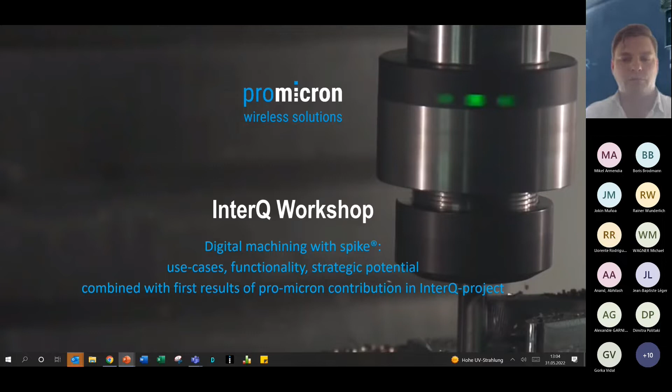As agenda, I will start with the following topic: what does Promicron understand by digital machining? What is our goal, what is our uniqueness, what do we want to achieve? Then I will explain the unique measuring concept, the current situation with the software and hardware, and give an outlook for the development. Then we will quickly go into the use cases of InterQ, and at the end we will have questions and time for discussion.

I will start my timer - 40 minutes. In 40 minutes I would like to discuss the questions, so to start with the questions: if there are concrete questions in between, please let me know. I can say if this is relevant now or if I will answer that later on, but sometimes direct questions on specific topics need to be answered directly.

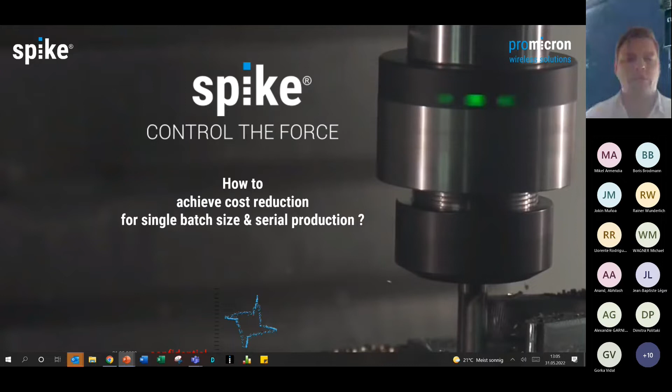What is it all about with Spike? This is a little bit the pitch I use also in sales, and I start with a question: how do we achieve cost reduction for single batch size and serial production? And to introduce the topic where we are focusing, I start with another question.

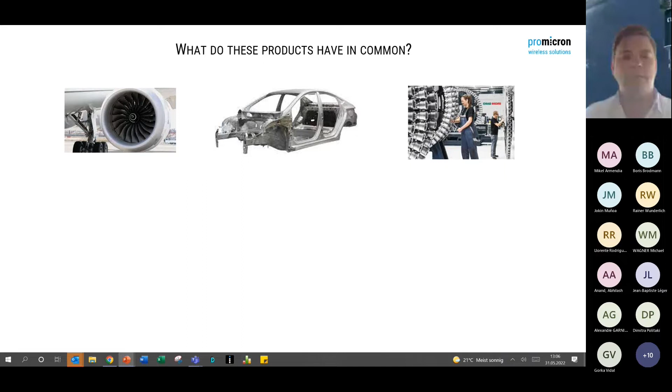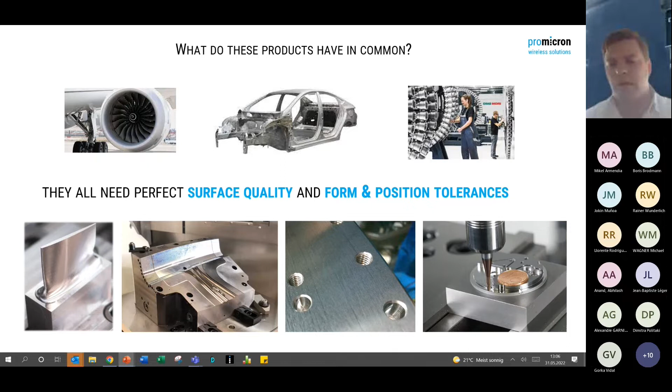What do these products have in common? They represent a little bit the industries - aerospace, die and mold, automotive industry, high precision machining - and the answer is they all need perfect surface quality and form and position tolerances. It doesn't matter if it's a Blisk, a blade, a die, a huge precision workpiece, or if we talk about micro machining.

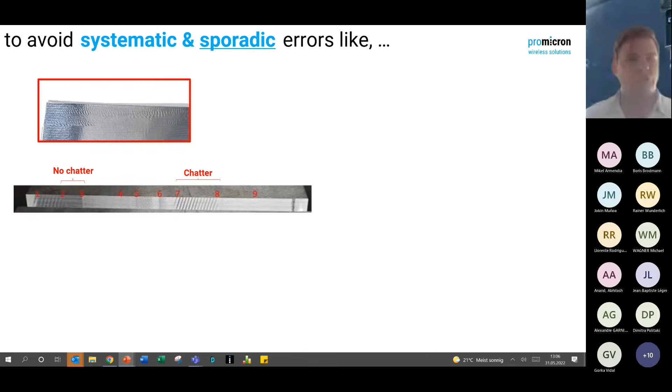To avoid systematic and sporadic errors like this, for example a chatter mark or chattering, or a scrapped thread, or single cutting edge tool wear and single cutting edge breakage - here with a full fluted end mill, here with a ball end mill. So it's a systematic error here with systematic tool wear, and here it's a sporadic tool wear with a scratch on it with a chip.

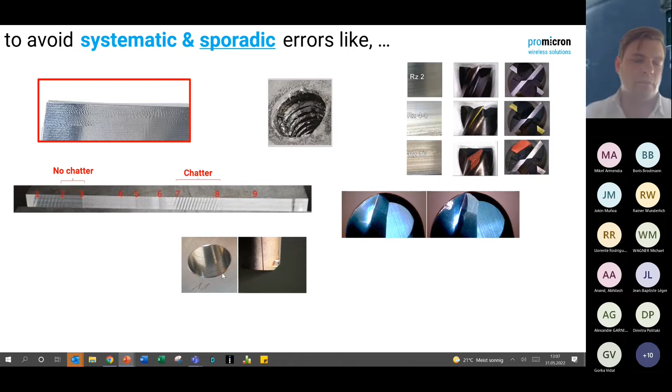Here we see a micro chip tool wear on a reamer, which cannot be seen with your own eyes, but this leads to bad surface quality of the hole. We also have sporadic mistakes like tool deflection when the form and position tolerances are not in line, and in micro machining, tool breakage - even quality issues are a topic.

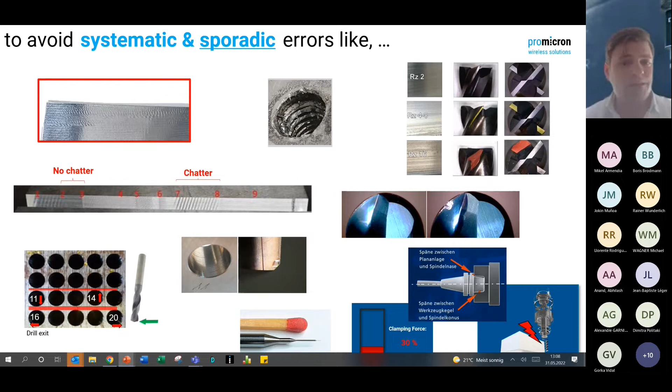And last but not least, issues like a 10 micron chip between the tool holder and the spindle, or a spindle overload while cutting, or if the clamping force of the tool holder is not enough anymore. All these systematic and sporadic mistakes happen in machining, and in order to avoid these, the manufacturer needs to check every workpiece made.

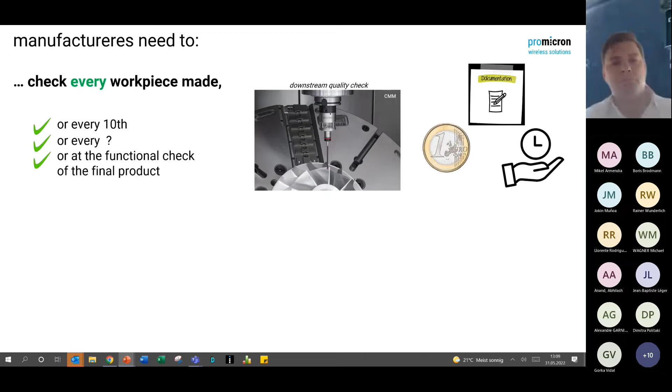So he has downstream quality check efforts, and depending on the customer, they check every 10th, or only at the functional test. That means downstream quality effort, which means costs, documentation effort, and time. I think this is also the main topic of InterQ - we want to have in-process quality control, to be more competitive by cost reduction, by making production more simple, and to take the costs and efforts we have pre-process and post-process and bring them in-process.

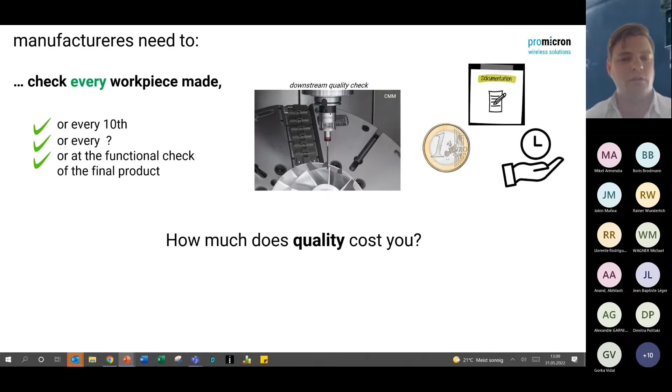So my main question to the end users is: how much does your quality cost you? Because this is what we want to reduce.

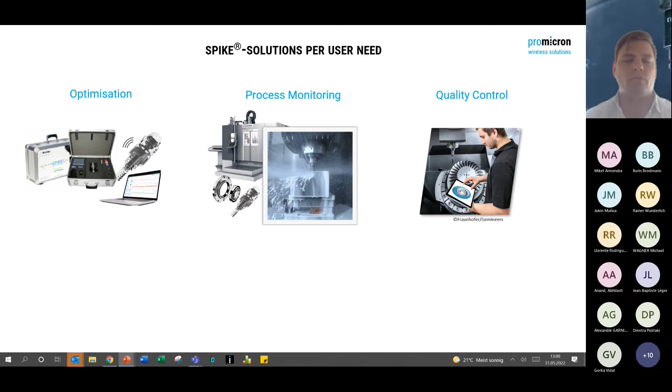This is an overview of our Spike solutions per user need. If we look at the pre-process analysis and optimization, we can use the collected data, the system as a diagnosis system. When we talk about downstream use of the generated data, we are in the area of quality control. And if we are in process, then we have process monitoring features to detect errors and automatically react. So basically, these are our three user groups.

When we look at the goal of cost reduction by in-process data, this graph should give you a little bit of an overview of how we see things and where we see Promicron located. Here we have the value chain of a production site. In the beginning, we have the construction with a 3D or a technical drawing.

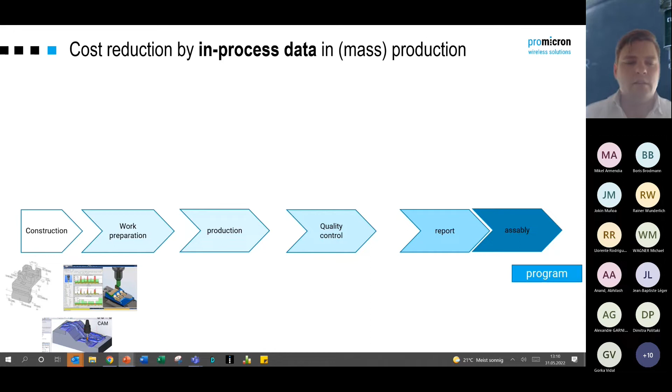In pre-work preparation, we have systems like Vericut Force, or we have the CAM program from Solid CAM or from other suppliers. In production, when we look at the machine, we have the machine itself, we have the machine data, we have external sensor data. When we look at the tool, there is a tool manufacturer with the tool management systems. When we look at the quality, there are the quality measuring systems all downstream, or a Blum laser, which can be used from process to process, but on the milling machine.

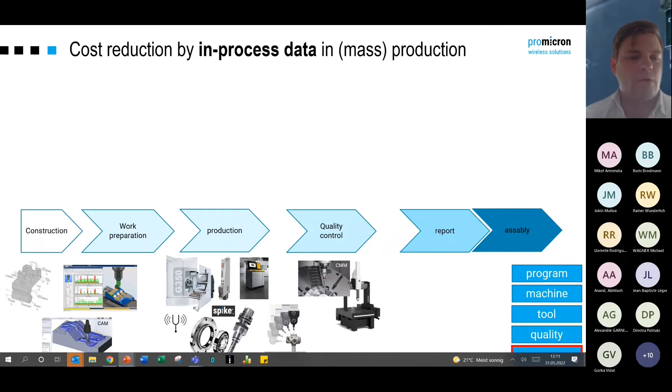And when we look at the process itself, then we also have data from our Spike technology. So there is our sensor located. Our data generation method, but the software from Promicron, the tool control center, is like an overlapping approach in order to, based on the data that we collect, provide output for every different user group along the value chain.

The goal is to bring down the downstream quality inspection effort in production and to have an exchange between the pre-work preparation and the production — for example, to get a reference force value in single part production from a CAM program or from a system like Vericut Force, and to monitor this value, this information, this force level, and also give feedback to the CAM program on where to optimize the program.

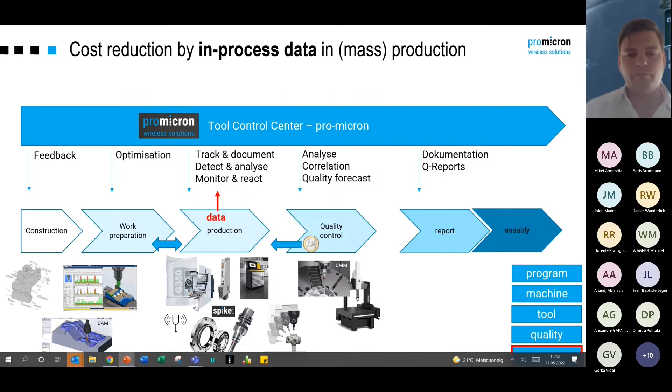Next point of the agenda, the unique measuring concept. Is there any question until now? It seems not. Let's jump into the next topic, the unique measuring concept.

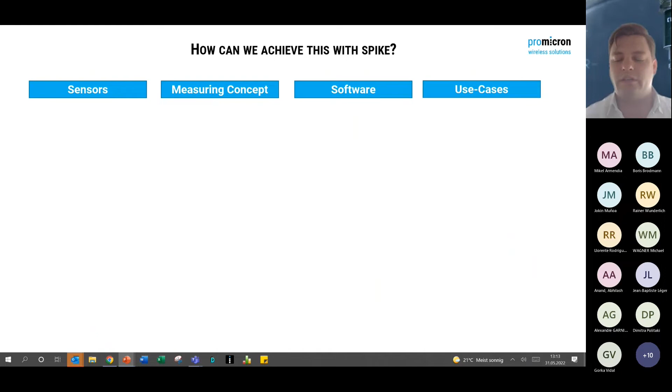Spike is not only a sensor, which is where we started. When we talk about Spike, we need to talk about the measuring concepts, the uniqueness, which kind of signals we provide. Spike is also a software, and the topic of use cases is also something I would like to explain quickly. Which kind of sensors do we have?

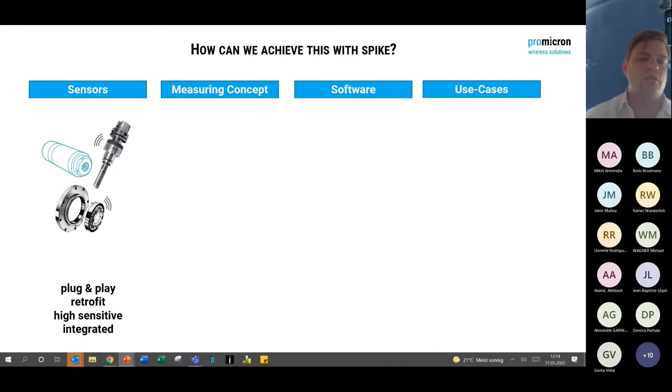Basically everything that is on the machine, because now we have the option to read the machine information — for example, the spindle load, the axis data, the NC code, the tool table — all this information we also see as sensor or signal data. And next to that already existing information, Promicron is now adding sensor data, force signals directly from the tool holder, as a retrofit solution, or the in-spindle integrated solution designed by DMG Mori Group and spindle manufacturers.

What's the uniqueness? We do not only measure the feed force and the torque, which can also be read by the axis load or the spindle current. In our case, we measure it directly. We also now have the bending load, the radial forces acting at the tool, from two directions — we look from the tool perspective, not from the component perspective.

Because of this, we are able to visualize the forces on each cutting edge. We have a signal, the bending moment signal, which correlates pretty much with the quality — so here we have a pretty nice and fancy quality-related signal. The signal is measured directly and transferred wirelessly to a receiver, which can be connected with the machine or not, in order to be flexible. But the concept here is wireless.

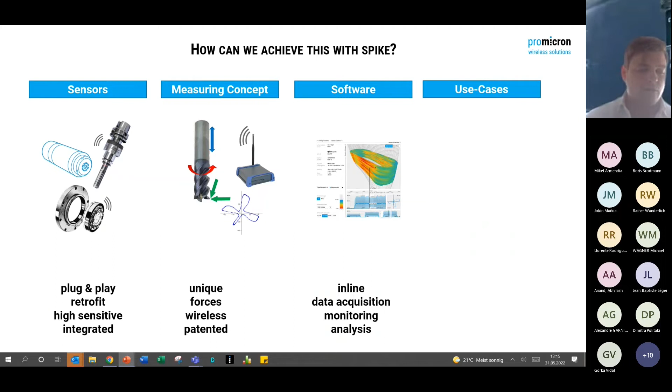The software — we started with a normal diagnosis software. Now we've designed a new software approach, being able to store the data web-based in a database. That's the first feature.

The second is we now have access not only to our own sensor signals, we can also read the machine signals, so data acquisition has been improved. It is inline, so we can record data automatically via the PLC or via the NC code, for example. And the software is getting more and more monitoring and analysis features.

As you know, software can improve through software modules or add-on modules — we just basically started with a new concept. Use cases is a very interesting topic. As we have it in the InterQ project, we try to involve the partners or companies along the value chain, because we know we cannot solve all the problems by ourselves. We are just part of the cake, let's say.

As we see, it's pretty innovative, and we are actively working together on solving use cases together. With our sensor signal and the software tools we provide, innovative business approaches, like which we also face in InterQ, are even possible.

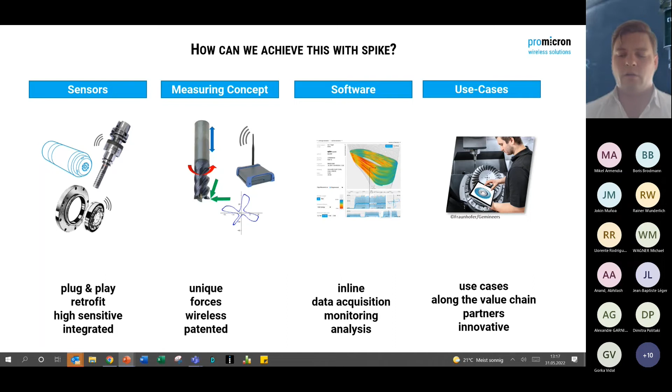Let's go a little bit more into detail on the uniqueness of the measuring concept. Again, our strain gauges with the electronic components and batteries sit on the holder in this ring, or in the spindle. Because of this, we are looking from the tool perspective. We have the axial force, the torque, the bending moment.

If we have a finishing operation like this, the single cutting edge is acting now in the material. That's why the bending load also has the time to jump back to zero before the next cutting edge comes in. By looking at a time frame, this enables us to visualize the forces on each cutting edge.

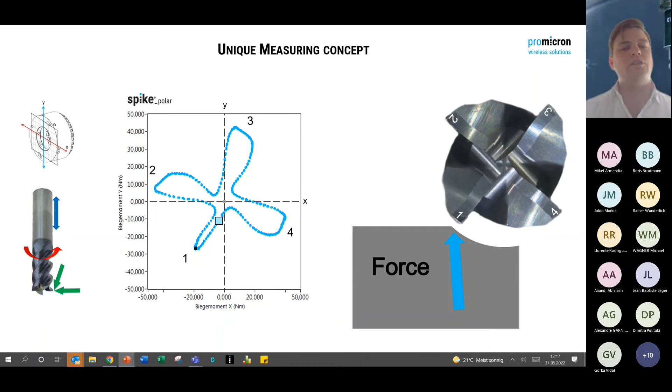Why is that beneficial? Because if we have a tool wear problem which leads to bad surface quality, and we do not want to stop the machine, open the door, and look at the tool or the surface quality, we need another method. Force is a very good feedback on the performance of the tool and the process stability, and this is what we do.

We visualize the forces on each cutting edge with the patented Spike Polar software feature. You see here the flower, let's say, or the cross, is small and symmetric. When the tool is wearing out, the force impacts and angles are changing, and the force value is getting bigger.

Effects like a tool breakage or cutting edge breakage can even be detected, because as an engineer you can read the picture. It's now unsymmetric, and one force flower, let's say, has been lost.

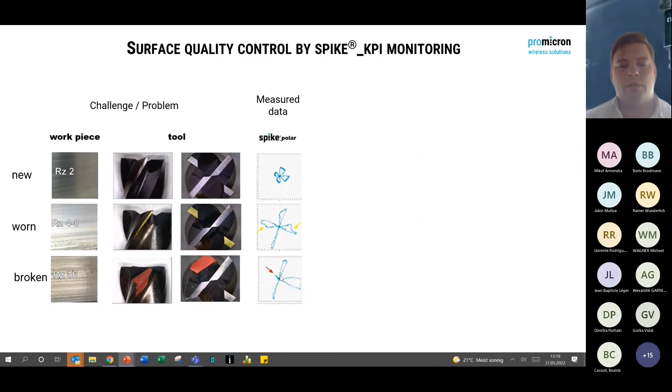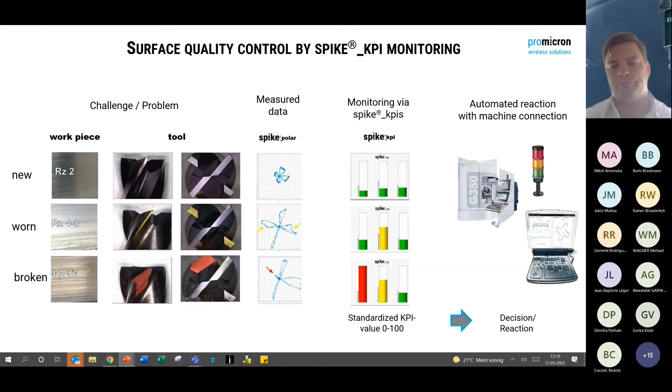The problem is we can measure and visualize it, but how do we monitor it? Here we are working on KPIs, process-specific values between 0 and 100, to give us feedback about the condition of the tool. And if we have this in our software, we just need a machine reaction, a method for integration, to achieve automation.

How does that look in drilling? In drilling, we want to achieve quality-related issues like drill runout, centering errors, tool wear, chipping, or concentricity errors, but also topics like tool breakage are interesting. Sometimes the spindle load is even sensitive enough to detect if the process happened, yes or no, but we want to focus a little more on the quality.

This is what we had here. We machined 20 holes and looked at the quality at the drill exit, and found that the tolerances of hole 11, 14, 16, and 20 were out of line. That means the tool must have been deflecting. Can you see this in the feed force or the torque, which can be compared to the spindle or machine information?

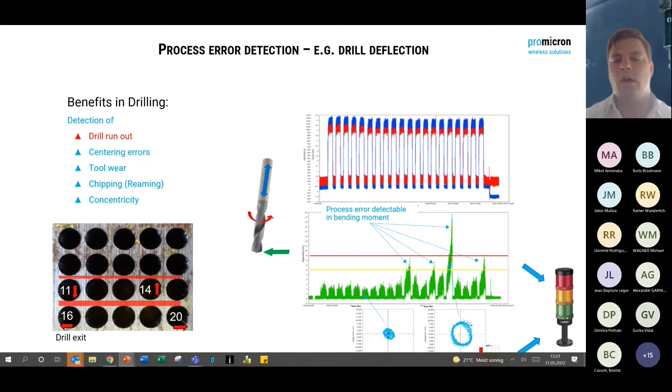No, you cannot detect it. But let's have a look at the bending moment signal. Here we detect higher load at hole number 11, 14, 16, and 20. If we have algorithms like envelope curves or the KPIs, this could be interpreted and monitored, and with a machine reaction we could even say this drilling hole, or now the drill, is not performing anymore, and trigger an automatic tool change.

So the concept is we are collecting big data directly from the sensor, but the software is filtering the data. Still, by reducing the volume, we are able to use algorithms like the symmetry KPI, a chatter KPI, a donut form KPI in drilling, or a runout KPI.

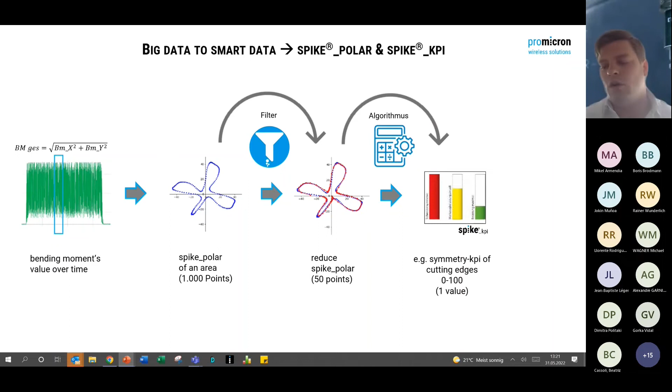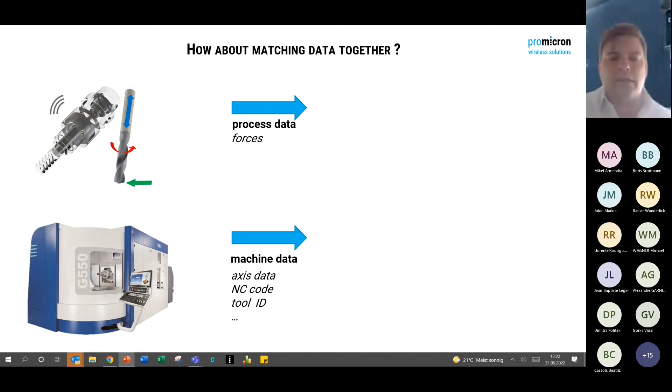Now, what's the current situation and the outlook for development? In recent years we thought, now we have the external sensor data from Spike, but what about matching that process-related data with existing data that's already on the machine, like the machine data, axis data, NC code, and the tool ID? I think we can generate much more benefit from that.

Even when we talk about topics like digital twin, everyone says we have a digital twin of the CAM program, of the machine, or even of the CMM part. But what about the process? This is also found and used in the InterQ project.

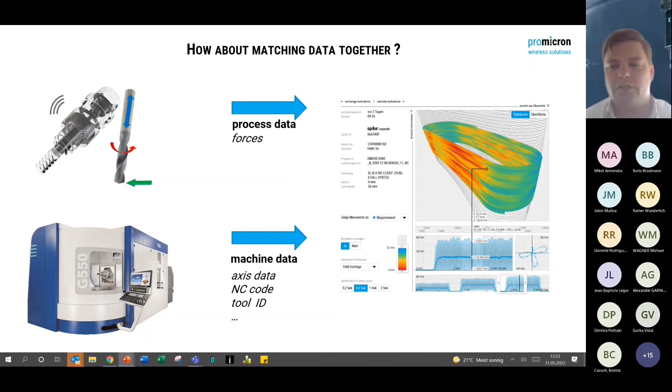And here we place the first version of our software, where we are now basically visualizing and matching the forces collected by the machine, spindle torque, or external sensors like the Spike bending moment signal, with the NC code and with the position, the XYZ position of the tool center point. Based on this, we don't only have a tracking software and visualization, we can also export the data, and more features like offset detection and so on will be available in the next years.

This is the Blisk machining example, which we have shown also during the InterQ general meeting. I would like to show you now our typical Blisk example, which we have machined just two weeks ago when a machine tool builder was visiting Promicron.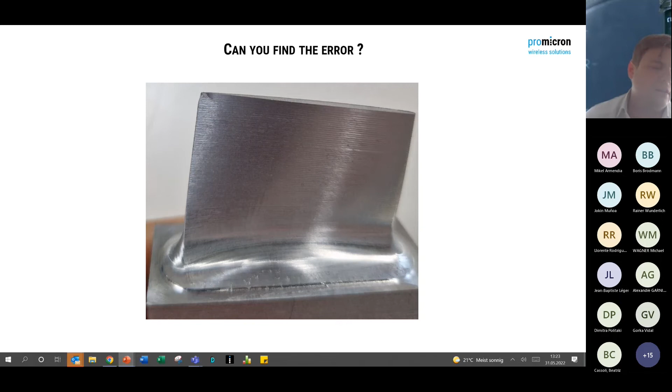My question to you is, can you find the error? Can you find the quality related issue on that part? The customer and visitor said, yes, I found something, it's here top on the left. And I said, okay, I didn't know what the data was giving us from the Spike software.

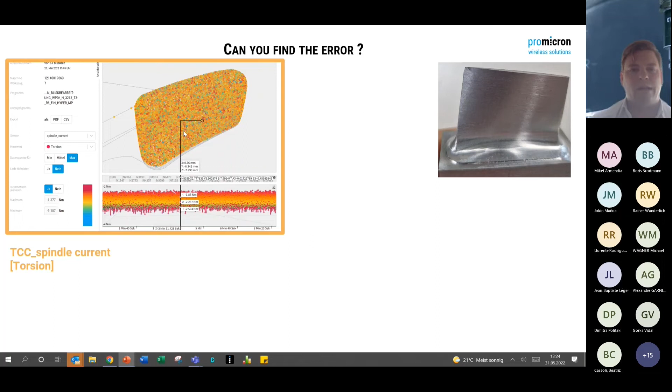So we started by looking at the spindle current, the torsion signal from the spindle, in our Spike map software. And this is what we got: the force data with different force levels, colored in different values, linked to the NC code and linked to the position on the part. But yeah, it's like a big cloud, I cannot see any force differences.

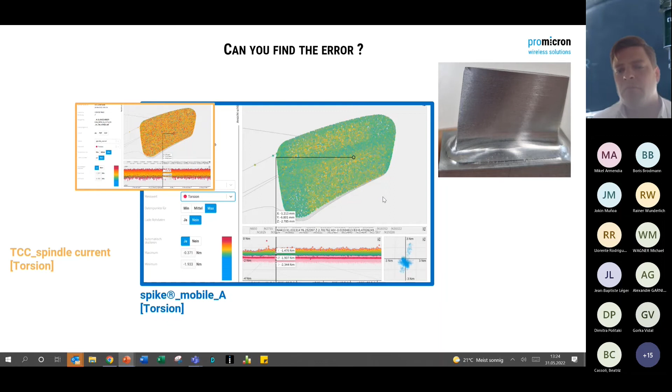Then I just switched in the software to the torsion signal from the Spike mobile holder, which we have used, and we already saw a little bit more difference between the noise and the forces. The coloring, also the scale, was already showing us a little bit more detail, but still I would say I cannot see the error.

Let's have a look at the bending moment signal, which we collected, and now it is getting more clear. This is exactly the same spot in the, let's say, digital twin of the process, of the workpiece, of the cutting forces linked to that spot of the part.

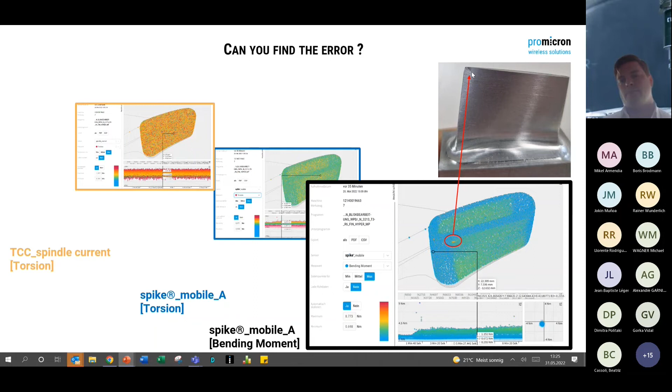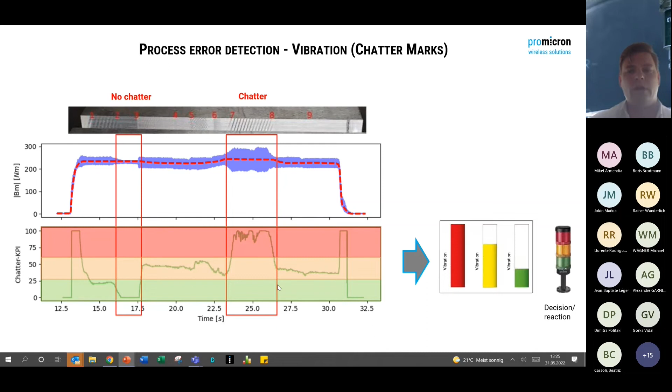So when we think about further production or line production, we have issues like chatter marks. With Spike, we can record that data. With Spike KPIs, we calculate, we analyze inline that kind of issue, and we create that output with the KPIs.

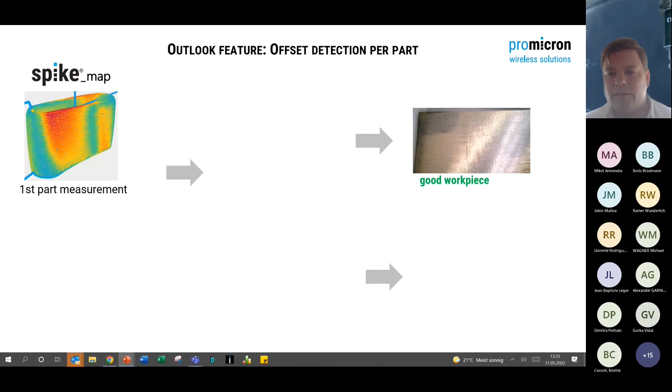If we have recorded now the first part, checked the quality and seen that this is good quality, then in a new software feature which we are working on, or which could be an option, we create a reference file. And now if there is, in the next part, a chatter KPI warning, let's say, then we could mark it in the reference file directly where this is on the part, in order to know already in process if we have quality issues.

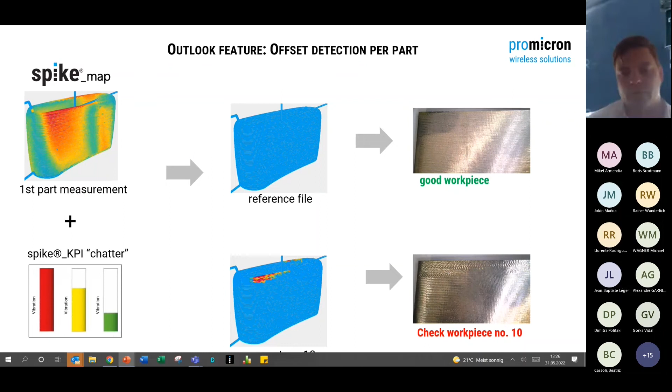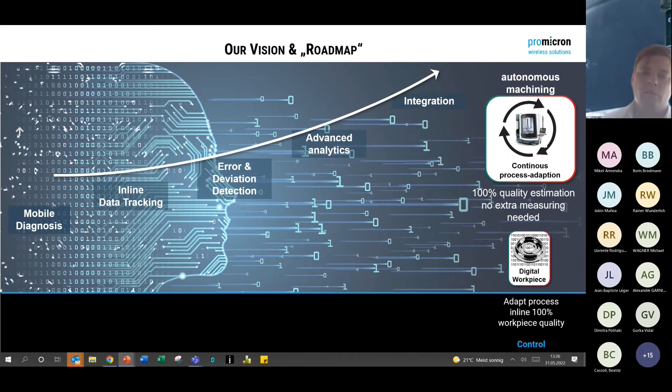So our vision is also fitting to the InterQ project and to the goals. The autonomous machining, continuous process adaptation, and 100% quality estimation without extra measuring effort needed, is the main goal. The digital workpiece is the tool, I think, which enables us to achieve that. But until we achieve that level, a lot of homework needs to be done.

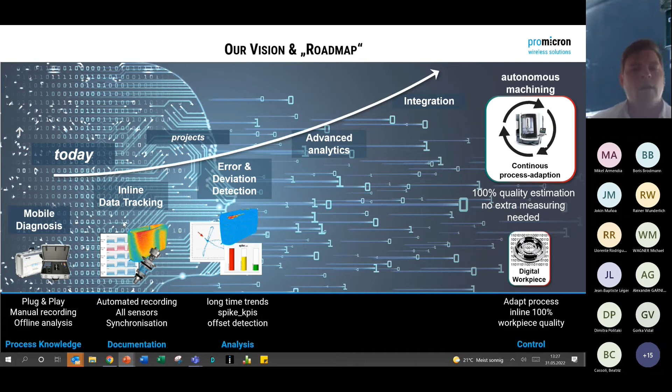Today and in projects, we are at the level of using the Spike technology as a mobile diagnosis system. With the tool control center software, we are now having an inline data tracking opportunity. And in projects, like InterQ or other own projects which we are running, the error deviation, or error detection and advanced analytics, is being done in order, later on, step by step, depending on the use case, to integrate that system directly also for monitoring and for automation.

But these are all the homework on our roadmap, which we need to do together in order to achieve the digital workpiece.

Now, I would like to go into the next topic, the use cases and the status of Spike technology in the InterQ project, if there are no questions until now.

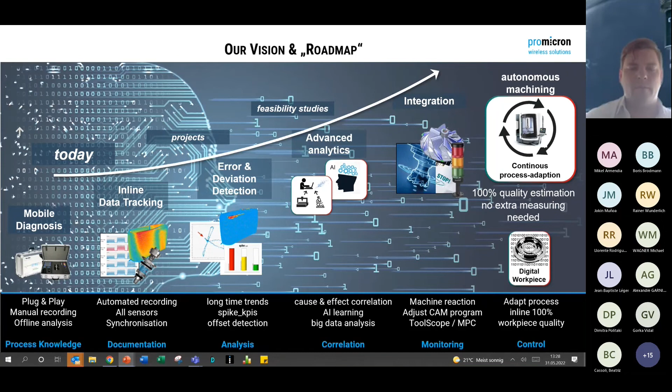I copied a little bit the slides from the last presentation from Xavier. Where are we in the InterQ project? As you know, there are three use cases, from ITP, from Siemens Gamesa, and from Renault.

In the grinding operations, we focused on designing a more sensitive tool holder and providing data here. And on this same side, we said if we have that data, we need to work on the algorithms, the KPIs, and the data interpretation. So in grinding, our role is to provide a more sensitive holder and more advanced knowledge about error detection.

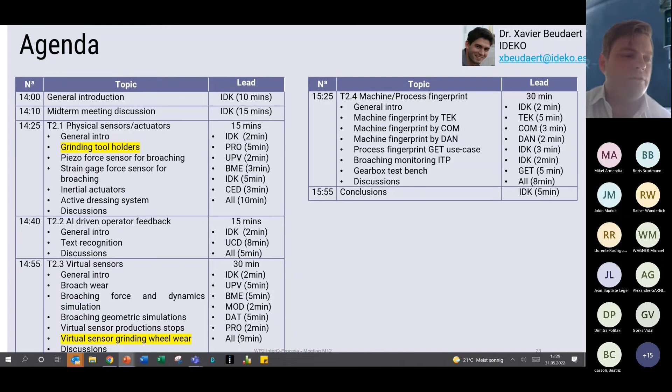Other features like the tool control center and the milling holders or drilling holders are also used in other use cases. But here we don't really need to go in with new development since it's already available. So a quick overview about the physical sensor.

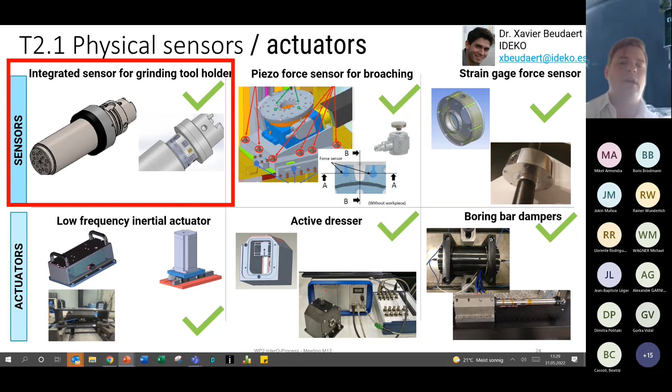Here you see the first prototype which we've done. Basically we are providing two solutions. One is with the standard sensor technology, but with an optimized and improved tool holder structure or design to achieve a higher stiffness and a higher sensitivity.

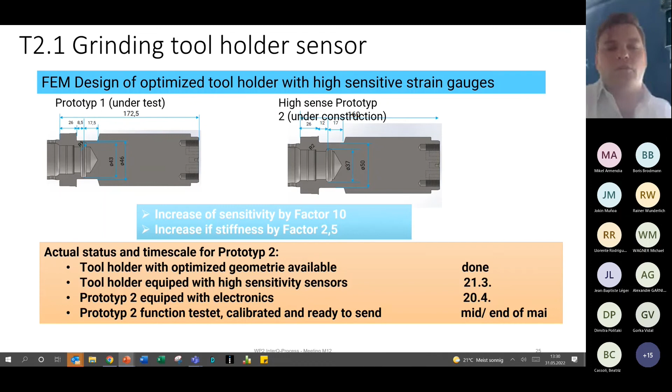Here we already received some improvements. We increased the sensitivity by factor 10, increased the stiffness by factor 2.5. But it's not enough. That's why we will provide a new sensor technology on that improved tool holder design in order to achieve a much higher signal and sensitivity.

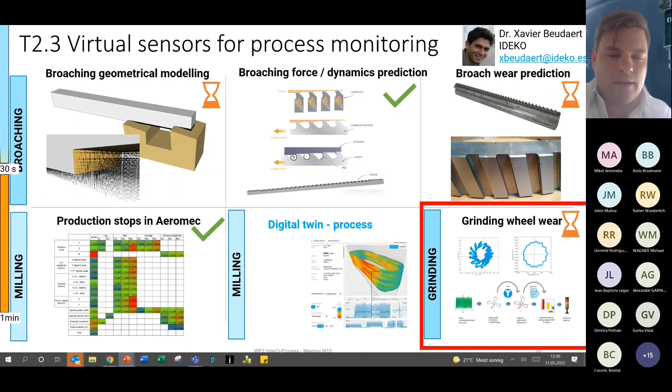The grinding wheel tool wear was the second topic. We have collected with Xavier and his team more data on grinding, which is now being analyzed to find out if there are criteria which are quality related and which could be put in as a Spike KPI. This is a quick overview of some tool wear trials which we have done.

You see the Spike Polar. It is centered pretty good in the beginning, so this is the first output which we can get. The balancing of the grinding wheel is pretty good.

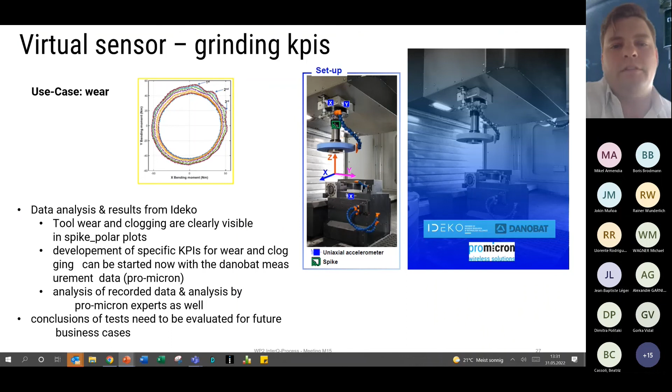But when we see the roundness of the Spike Polar ring, it's getting worse, especially in this area, and the force level is increasing because of tool wear. So these are now raw data signals which we are looking at more in detail.

These are some other examples - unbalanced effects or brushing effects, or dressing effects, are now going to be investigated. I just wanted to explain here what we did.

We have four different situations in the upper brushing example where we did a mechanical and an automated brushing process of the grinding wheel in four different situations, and this is the force signal output you get after these situations. If these are technical cases and process errors, they could look like this, and now we just need KPIs to analyze and monitor them.

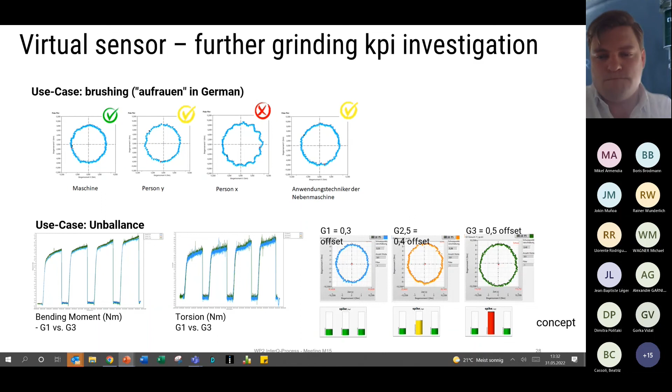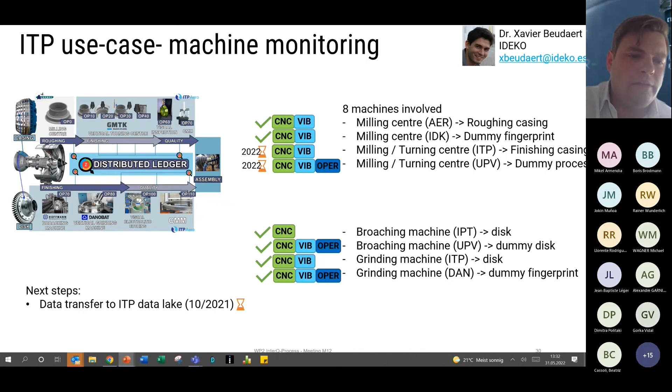In the InterQ project, there's one use case from ITP where a lot of turning, but also milling and drilling applications are in these operations. What did we do here?

With the CFAA, we installed the first version of the tool control center software, and we were trying to find out the sensitivities which are required and the software output which we are generating. We used a milling operation in this casing part, which we will now investigate more with ITP itself.

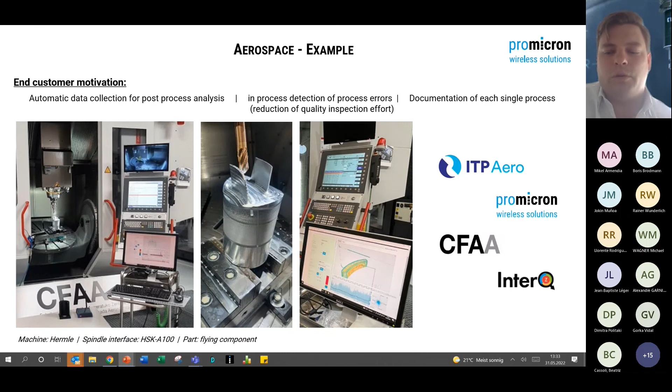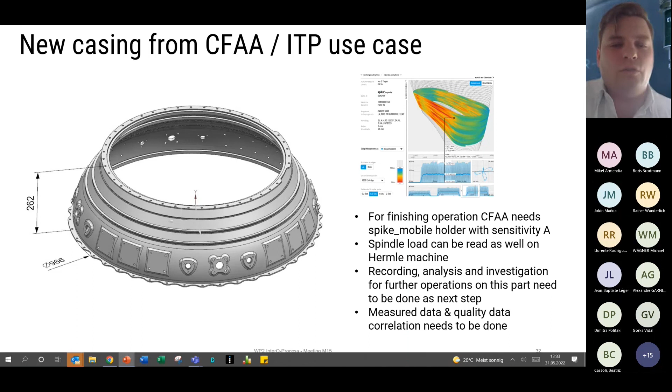As outlook, what I understood that we want to go on, and the CFAA team said that they are planning to get this reference InterQ project part also on one of these machines. And we want to use our Spike Map software on it for data tracking, not only the Spike mobile data - bending moment, torque, and axial force - but also the spindle load signal, in order to find out in which operations do we get which kind of output and how quality issues look like in that kind of data.

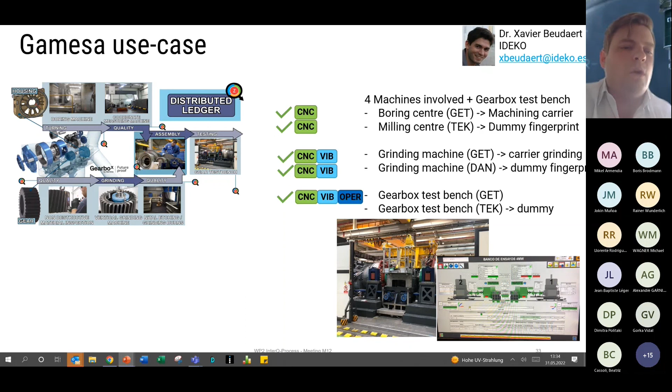There's the Siemens Gamesa use case. Here we are focusing more on grinding, where the grinding holder currently at IDEKO for testing is being used. The grinding holder which we are developing is the main focus. But sure, reading the machine information and synchronizing it together in the tool control center software in the Spike Map is a use case, but it's not the main focus.

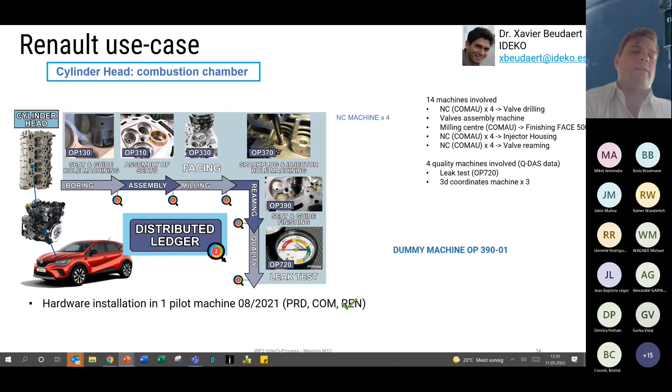And in the Renault case, I think you all know the background - here we are focused a little bit more on drilling and reaming operations. I just wanted to emphasize again, we did a similar application with a market partner, a similar company to Renault before, where we found out that the bending moment is a pretty nice signal which could help detect single cutting edge issues or run out issues, form and position tolerance issues, and which can be used here as well.

I'm already reaching the end of the key fact information, and now I would like to go into further questioning and discussion if needed. Since I know that many of you are looking at the InterQ project from different orientations, I can help here to link the connections. Thank you very much for joining this workshop, and let's now get more into the questioning and discussion.